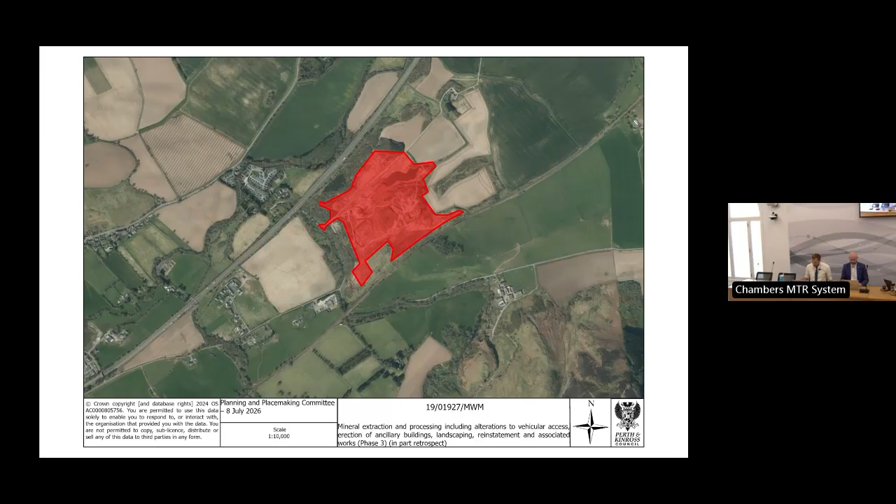Here we can see the location of the site, which is just to the south of the A9 at Shinafoot, Auchterarder, with access obtained from the B8062. The site extends to approximately 21.77 hectares and for many years has operated as a small-scale sand and gravel quarry, comprising a compound area, processing plant, silt ponds, access tracks, and areas of previously worked or partially restored land.

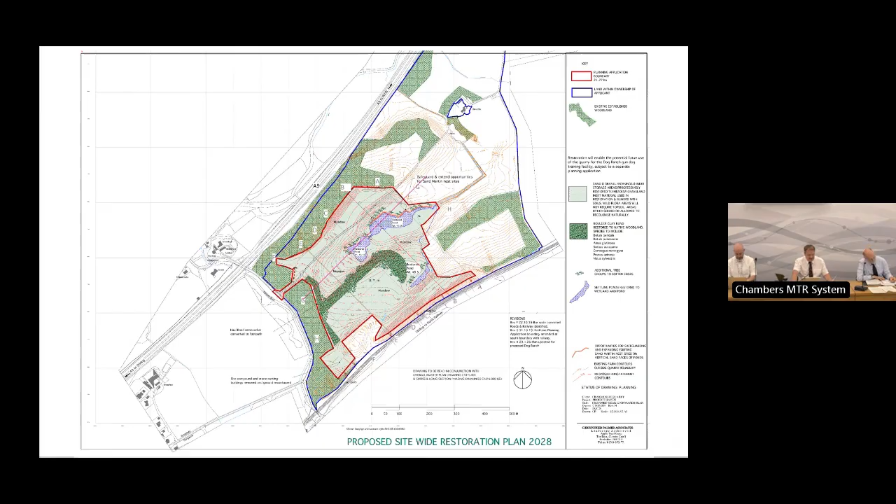This is a local application for change of use of a quarry to a gun dog training centre, including erection of kennels, a veterinary practice, reception building, indoor arena, maintenance building, staff and student accommodation, and installation of PV and air source heat pumps, with associated works, on lands southwest of Arns Farm, Auchterarder. To introduce the report is Mr. Panton.

Thank you, Convener. This next application relates to the quarry site we previously considered. The proposal is to make use of parts of the Craigrossie quarry by the applicant Mordor Gun Dogs as a dog ranch. Mordor Gun Dogs has a contract in place to purchase the entire Craigrossie quarry from the current owners, subject to receipt of planning permission today.

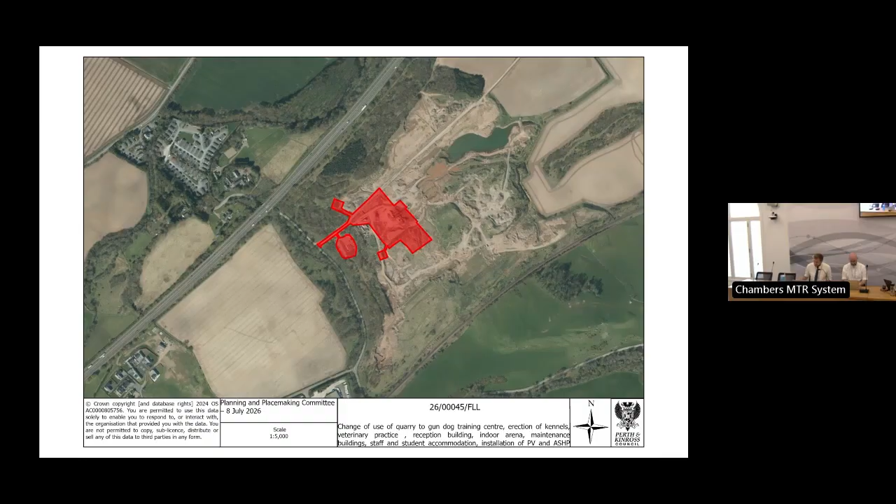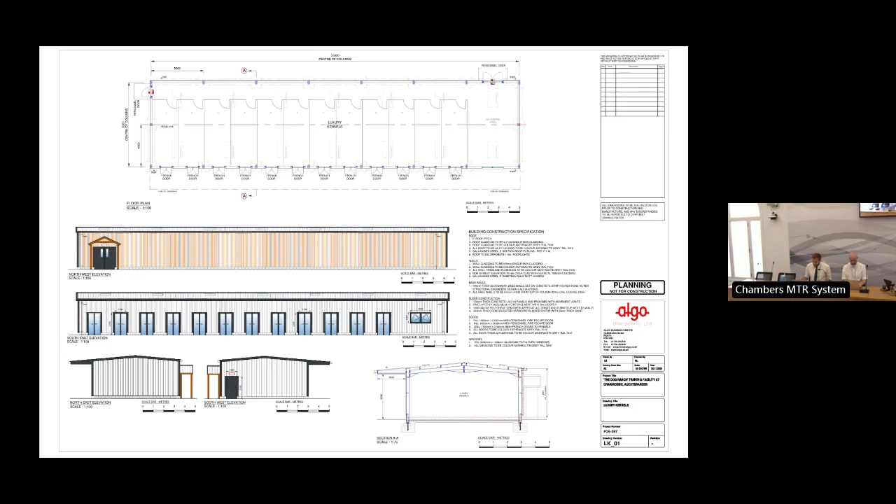Next slide, please. We now have the elevations and floor plans for the proposed luxury kennel building. As you can see, this building accommodates 12 spacious pens with their own doors. Next slide, please. We now move on to the proposed arena building, which would be the largest building on the site. Next slide, please.

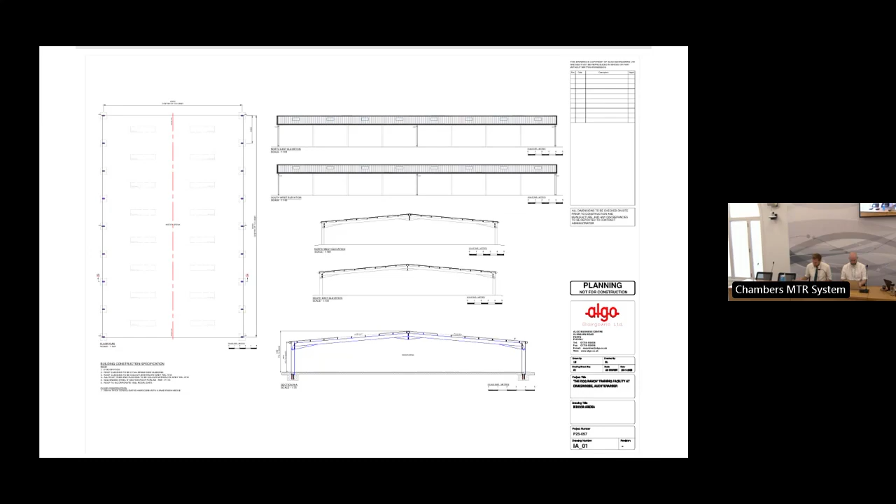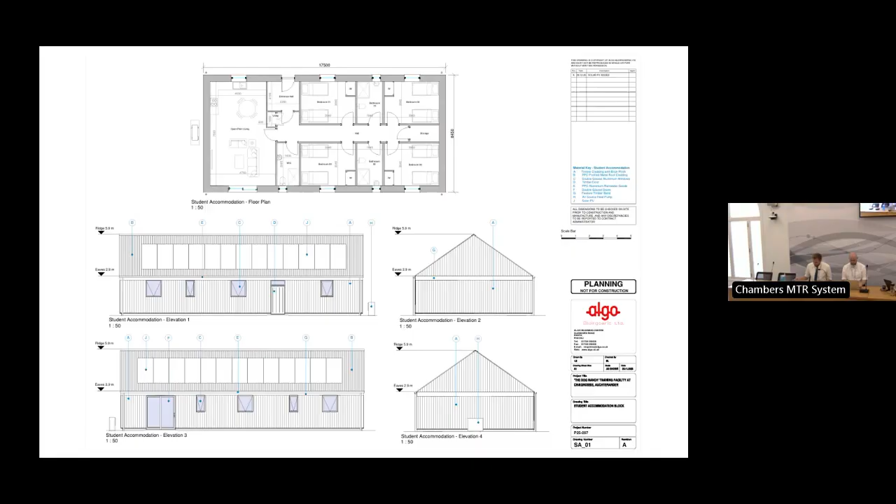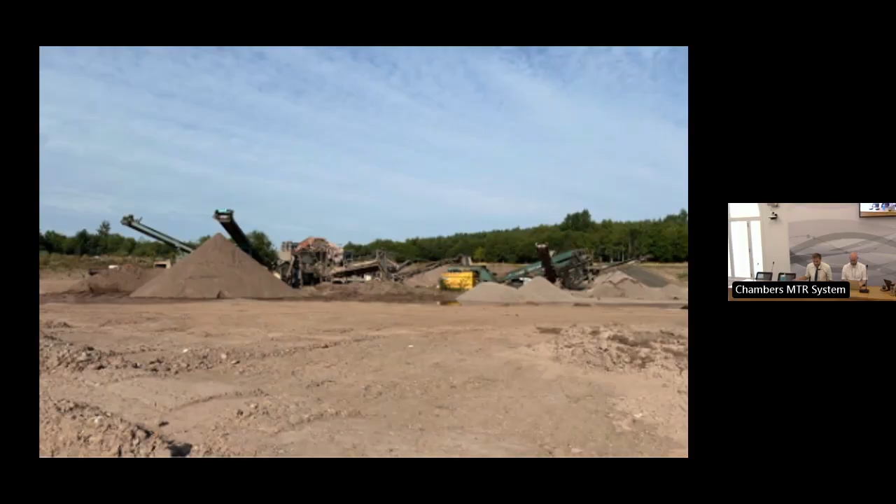Turning to images of the site now, here we can see some of the existing quarry operations which will be removed to accommodate the proposals. Next image, please. This next photograph again shows some of the existing operations. The proposals are considered to be a significant improvement from this. Next slide, please. This final photograph shows the existing sand and gravel quarry again, as detailed in the last application. Next slide, please. Thank you, Convener.

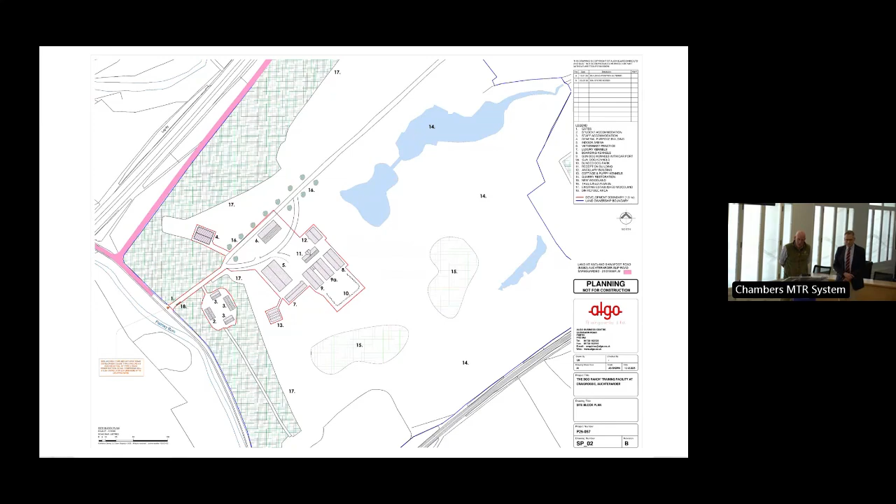Gentlemen, there's no further questions, you're free to go. Convener, there's no further deputations on this application, so I'll hand back to yourself. Thank you - can I ask members if they have any questions for officers?

Councillor Cuthbert: Thank you, Convener. I just wondered why this was coming to committee, because it's a local application. I don't see any objections, so I just wondered why it was here.

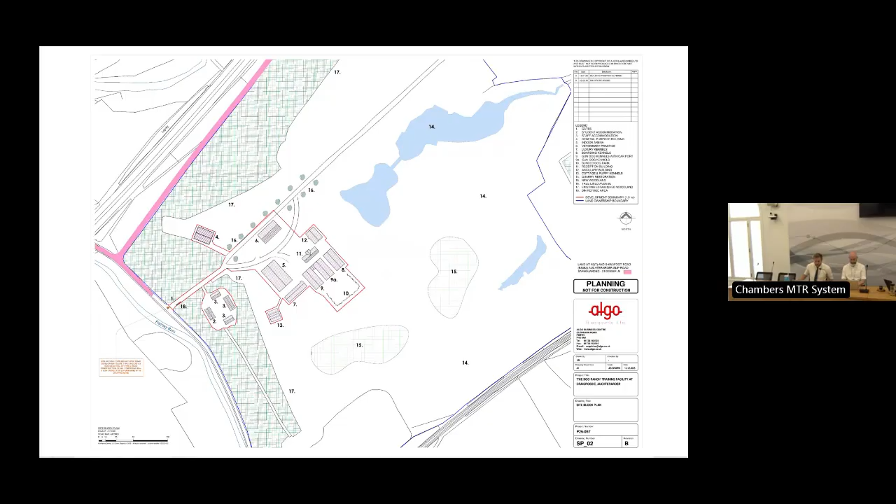That's a fair question. Ordinarily it wouldn't come. It's just because it was associated with the last application, which was a major, and it was cleaner to have them both determined together.

Okay, thank you. Councillor Harvey. Oh, just withdraw, sorry, same okay, question. Thank you. Can I ask for a motion?

Bailie McLaren, we'll take your motion. Thank you, Convener. Thank you. Yes, I would happily move the motion to proceed as per the recommendation set out in the paper by our officers.

This application represents a strong rural business that is growing, and it also consequently is dealing with the quarry site, where there's a win-win here for us, but this is local employment, local visual restoration, and it's something that is a really positive application that we're determining here today. So I'm delighted to be able to

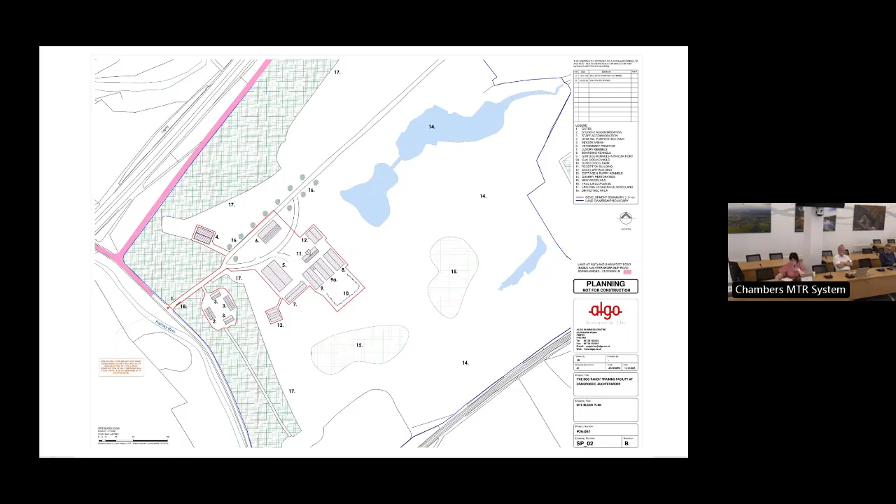put this forward for approval. Thank you. Councillor Allen, do you wish to second? Why not? I welcome the proposal, and indeed I look forward to the outcome. I've got absolutely no hesitation in recommending the approval of this plan, as was clearly obvious. Thank you.

Thank you. Do we have an amendment? No amendments. Therefore, can I ask committee to have any comment on the report?

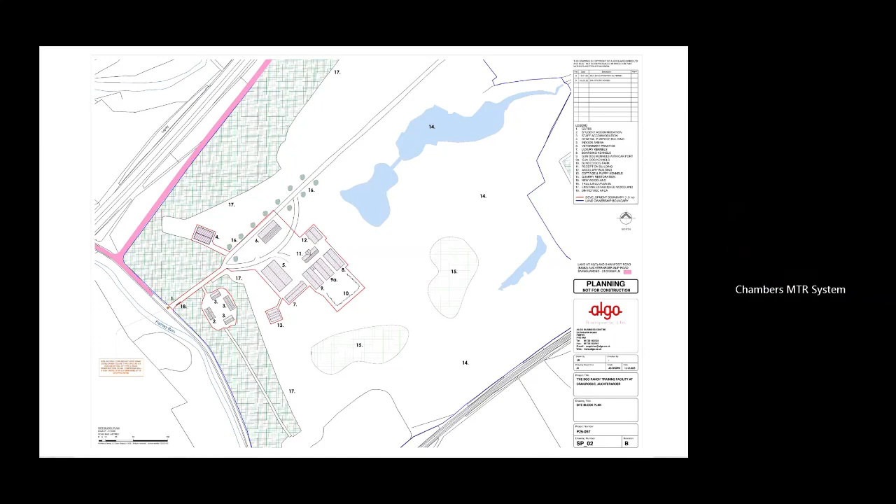Councillor Forbes: Thanks, Convener. I think this is a really interesting business, and it's great to see a business that's doing so well internationally, based in Perth and Kinross, and willing to invest some money into expanding. I think it's something that as a council we should be supporting more of. Delighted to hear also there won't be any illegal substances stored on site.

Thank you. Any further comment? No further comment. Therefore, planning permission is granted. Thank you, with the section 75.

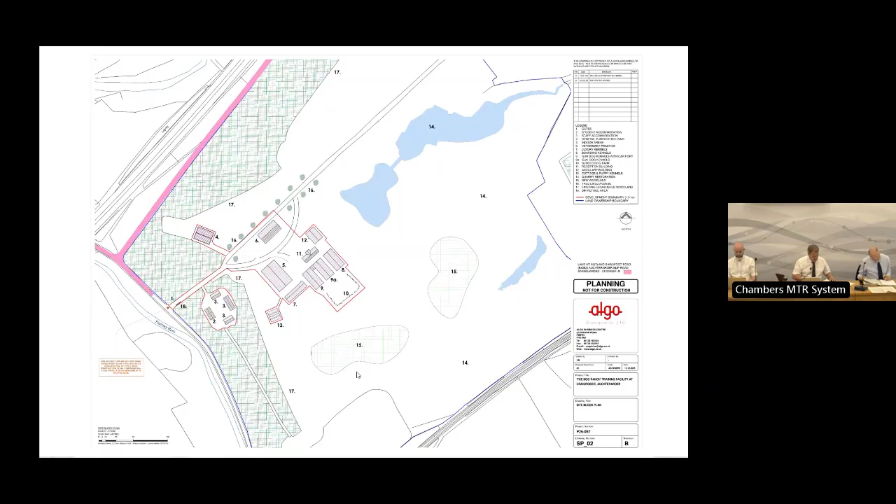Okay, so we now move on to the next one, which is a major application, for the formation of a 39 megawatt solar farm comprising ground-mounted solar PV array, battery energy storage system, a substation, inverters, transformers, welfare containers, fencing, CCTV cameras, vehicle access and associated works at land 890 metres east of Binn Farm, Strathmiglo. And to introduce the report is Mr. Panton.

Thank you, Convener. As stated, the next major application on the agenda today is for a 39 megawatt solar farm and battery energy storage facility with associated development at Strathmiglo. Members should note that only one neutral comment was received with no public objections. The proposal is therefore before the committee today, as it constitutes a major development. I will now take members through a short presentation to detail the proposals further.

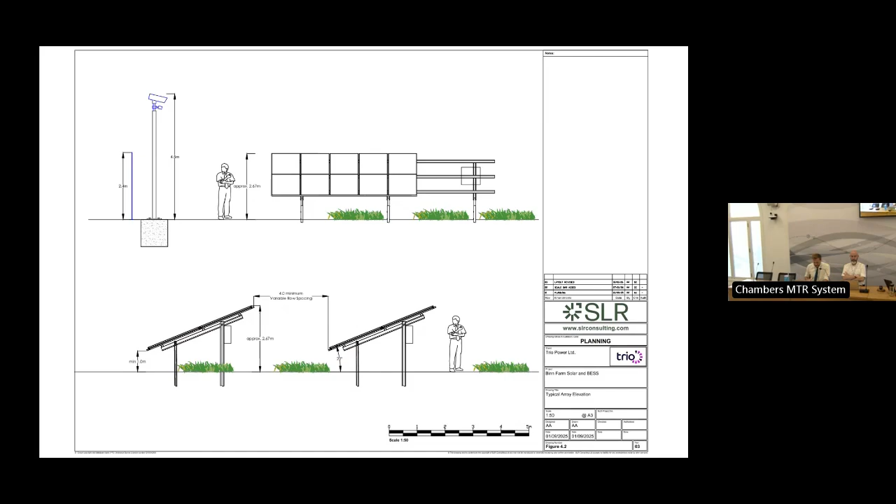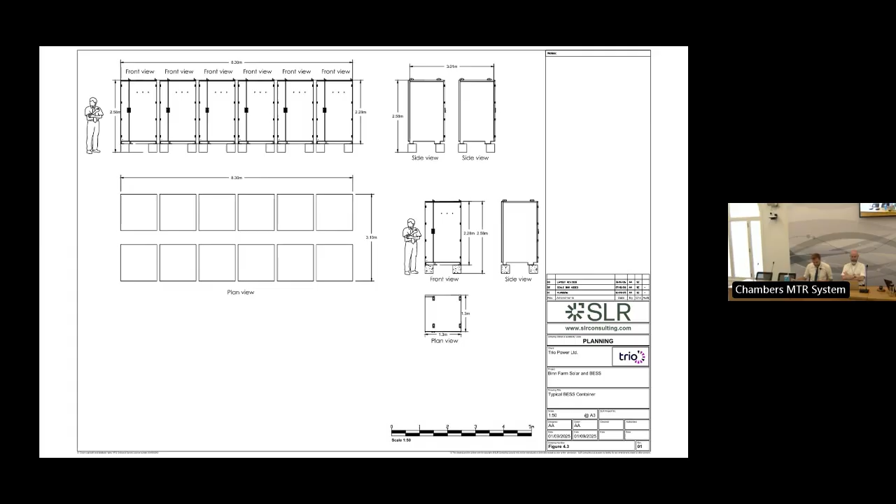That now concludes my presentation. I will leave members with the proposed site plan for reference. Members should also note the circulated update to the report, which updates some paragraph wording and conditions and also removes some duplicate informatives that were added to the report in error.

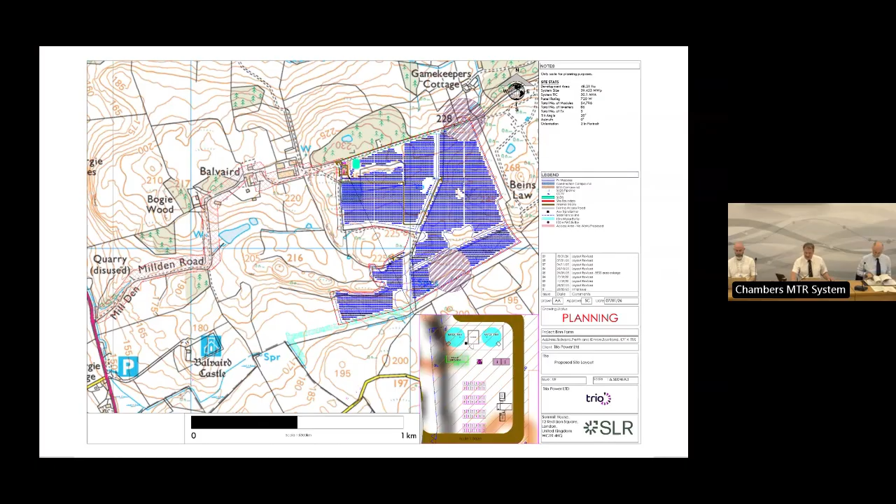Thank you, Mr. Panton. Again, we have deputations on this item, so I'll now hand over to the Vice Convener for the deputation procedures. Thank you, Convener. Can I call Mr. Lindsay, applicant? Good morning, Mr. Lindsay.

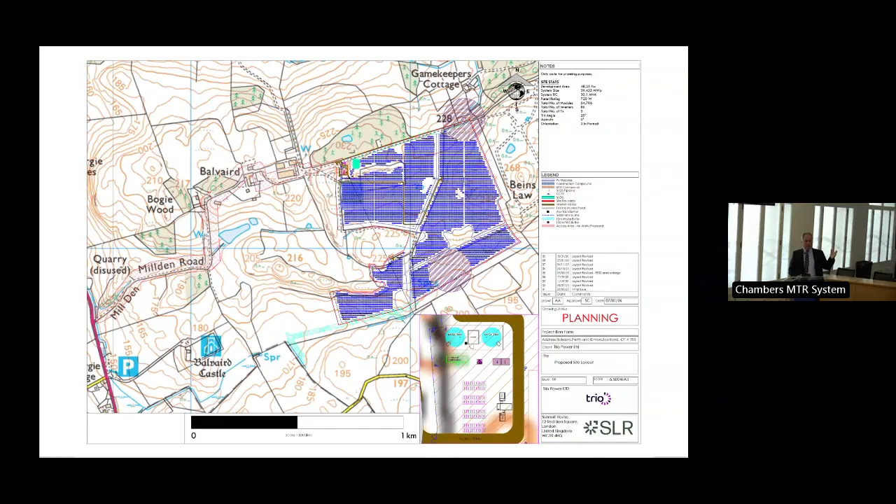Yes, there is. If you look at the map, the battery storage facility and the substation building is on the top left-hand corner, and that is quite close to some of the farm buildings where there's cattle storage at the moment - probably 100 meters or so, probably less actually. You can see the farm buildings in an area to the right, so the water will be provided from there. There'll be 2 points of access in and out of the battery compound, God forbid we need to have fire engines get access to it.

Councillor Allen: thanks Vice Convener, Mr. Lindsay, thank you for your presentation. It's quite something to come with one of these presentations and not have a lot of objectors, but we do have one representation about screening. So if you could just explain what your plan is for that.

That representation about screening was actually from a lady we know very well, who lives to the north about a kilometre away. Through her and her husband, we designed the screening at the top end - he has a background in this, so it was quite useful to agree the types of species of planting and how they should be planted. We know it's quite exposed up there, so some of the classical trees you might choose elsewhere wouldn't take in holes, so we adapted that. On the top right-hand side there's a new band of hedgerows and trees that will be planted, and that was in direct dialogue - we had probably 10 or so emails with that couple, and the gentleman was at the exhibitions, so we know him well and spoke a lot to him.

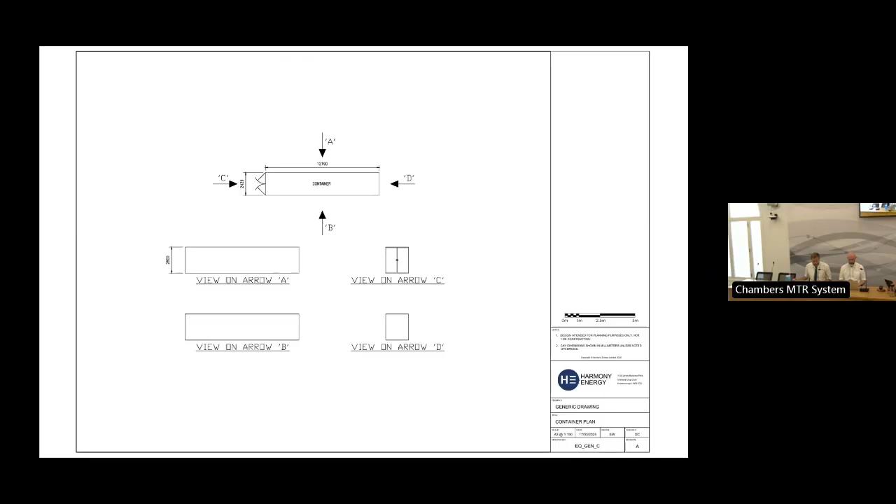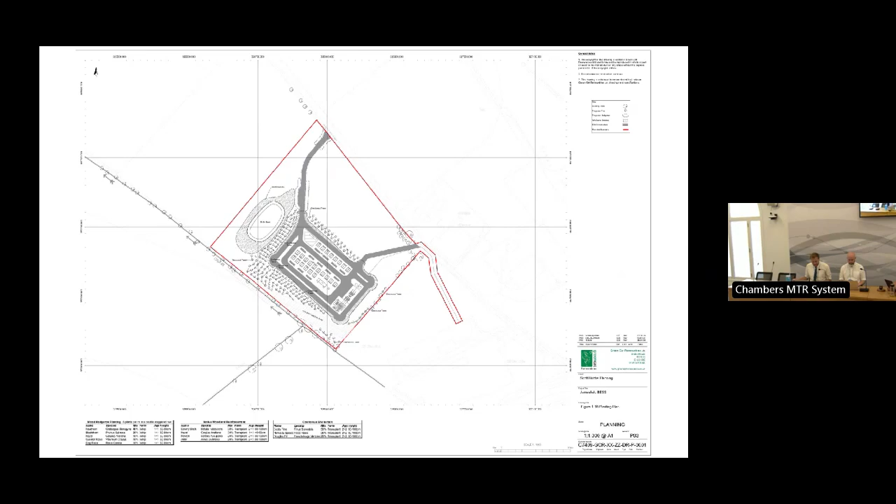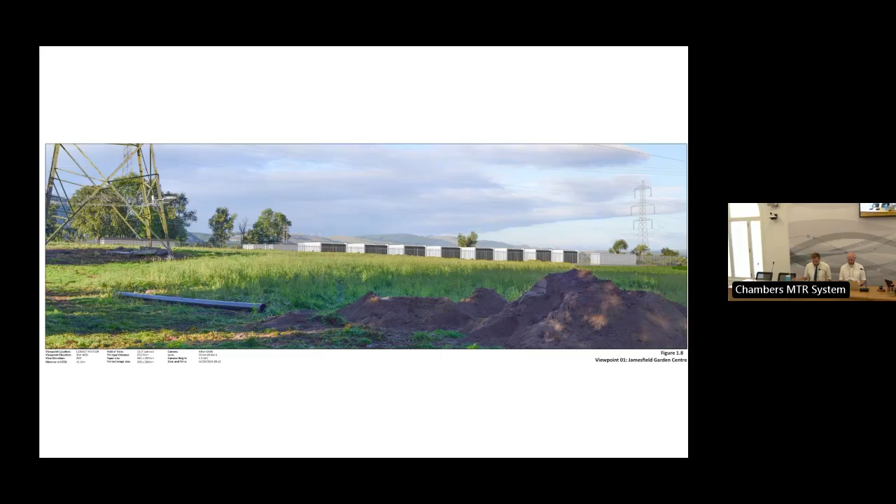We now move on to a series of recent photographs taken by the case officer on their site visit. This first photograph shows the site under question. You can note here that there are 2 pylon transmission routes that currently exist.

This next photograph again shows the site, this time looking back towards Abernethy. This final photograph shows the site in the winter, looking back towards the substation where the proposal will connect into.

Thank you, Convener. That now concludes my presentation. I will leave members with the proposed site plan for reference.

Before doing so, members should note that the circulated update to the report requires additional paragraphs, conditions and informatives to be added. In addition, members should note that the final page of the report indicates no letters of representation were received. This is incorrect, as 1 letter of objection was received, as detailed within paragraph 40 of your reports.

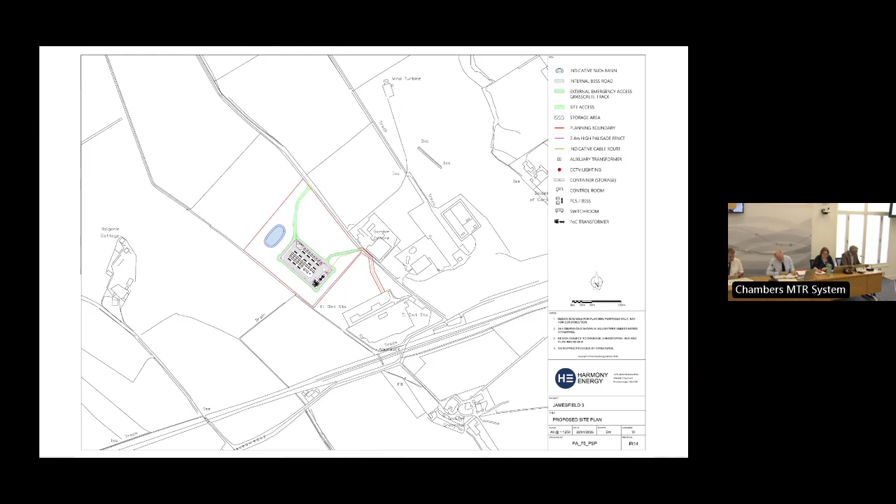Thank you very much. Good morning, Chair, and good morning, members of the committee. Thank you for the opportunity to speak in support of this application. My name is Tessa Fletcher, Senior Planning Manager at Harmony Energy, and we're the applicant.

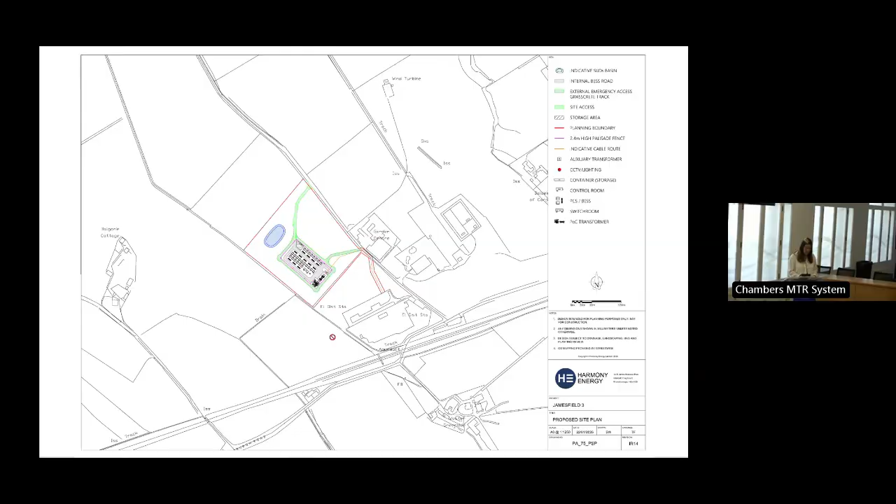Founded and headquartered in the UK, Harmony Energy is a leading developer, builder, owner and operator of renewable energy infrastructure, with an established track record of delivering battery storage energy projects here in Britain. We currently operate 17 battery energy storage sites nationwide, including the nearby 49 megawatt facility to the east of the garden centre, which was successfully constructed and energised in January 2024.

Throughout the determination of this application, we have worked closely with the case officer and would like to thank the Council for its thorough and professional assessment. We welcome the officer's recommendation for approval and agree with the conclusion that there are no material planning considerations which outweigh the provisions of the development plan. We also note that only 1 public representation was received and there are no outstanding objections from any statutory consultees. This proposal is for a 49.9 megawatt battery energy storage facility capable of storing sufficient energy to supply the equivalent of more than 160,000 homes for up to 4 hours.

This development would also help avoid approximately 6,000 tonnes of carbon dioxide equivalent emissions each year by supporting the integration of renewable energy into the electrical network. In addition to its environmental benefits, the project would make a meaningful contribution to the local economy during construction and operation, and can provide the opportunity for local supply chains and local trades to be used during the development's construction.

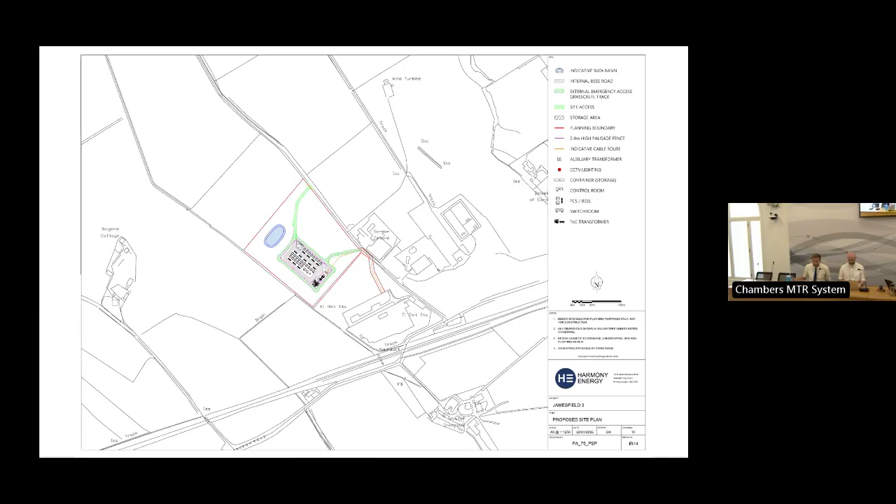One of the issues that was raised with me by the garden centre is the potential for fire, and she's saying I have to accept that she knows this better than I do. She says there's no fire hydrant or access to water anywhere nearby. Is that correct, and is that something that we would or have taken into account?

Thanks, Councillor Forbes. Most of that's controlled through the building warrant process, but as we saw in my presentation, there are 2 access tracks to this site, and that's a fire requirement, they have to have more than one access to the site. So from a planning perspective, they've met all they need to in terms of fire protection. It will now be over to the building stage to control that further.

Sorry, Councillor Forbes, I'm sure the applicant could have explained their approach to fire risk, etc., and I'm sure they have various things both on site and in terms of their action plans associated. It is a question that regularly is asked at this committee, but at this point in time, the planning regulations do not include for all those sorts of questions to be answered, and there are separate legislative controls. However, there is work ongoing at a national level that we hope to see come forward with guidance on what standards would be expected and should be set out at the planning application stage. It's not something we take into significant account at the minute, but there is work ongoing at a higher level, including the fire and rescue service, etc.

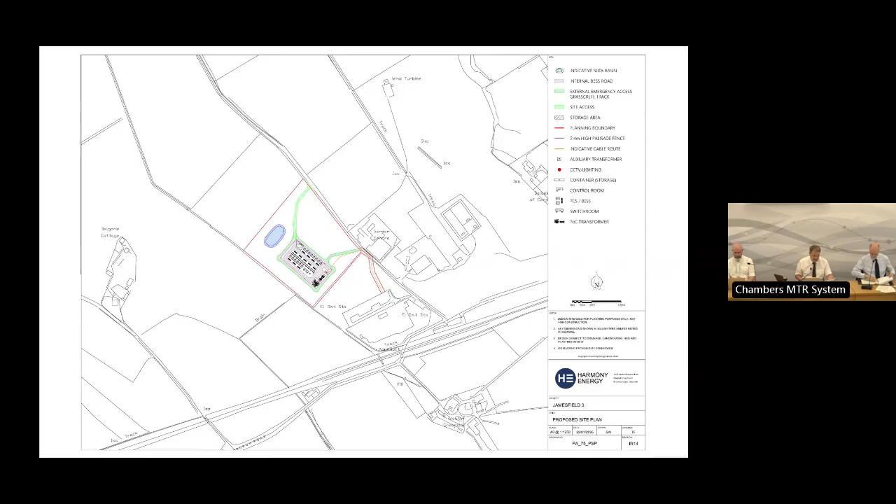Now we move on to the next item, which is probably going to be the longest one I've ever read out in my life. This is a Section 42 application to vary conditions 1, 3, 4, 5, 6, 7, 8, 12, 15, 19, 22, 23, 24, 26, 32, 33, 34, 35, 36, 38, 39, 41, 40, 42, 43, 45, 46, 49, 50 and 53 of planning permission in principle at Perth West. To introduce the report again is Mr. Panton. Thank you, very well read out, convener.

Planning permission in principle for a large-scale mixed-use development was granted on this site in November 2023. At the time the decision was issued, conditions were written on the assumption that the first approval of matters application would comprise a large-scale development, and as such the conditions were quite onerous. What is now likely to happen is that the first approval of matters application will be a small-scale application submitted by ourselves at Perth and Kinross Council rather than private developers.

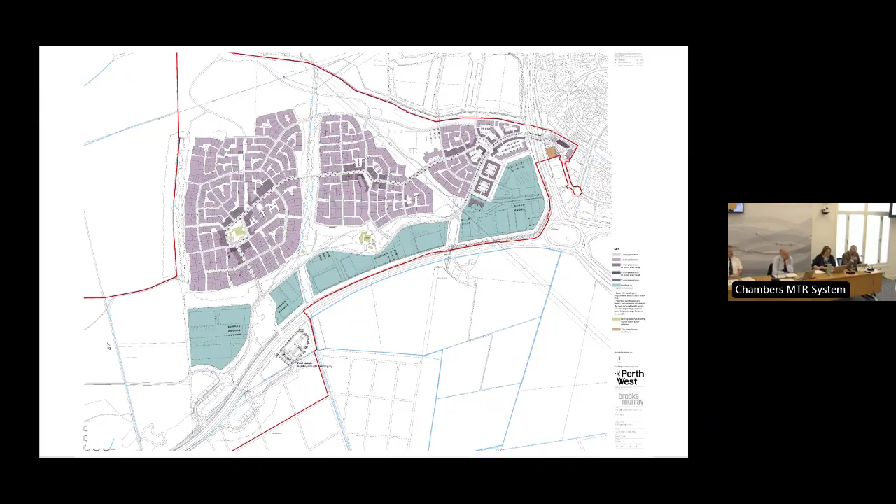Councillor Harvey: I'll ask a question. I was going to ask the officers, but I'll ask you. We heard the detail of what this change is required. Could you just give us a kind of practical or summary of what the change from previous to now is, in spirit?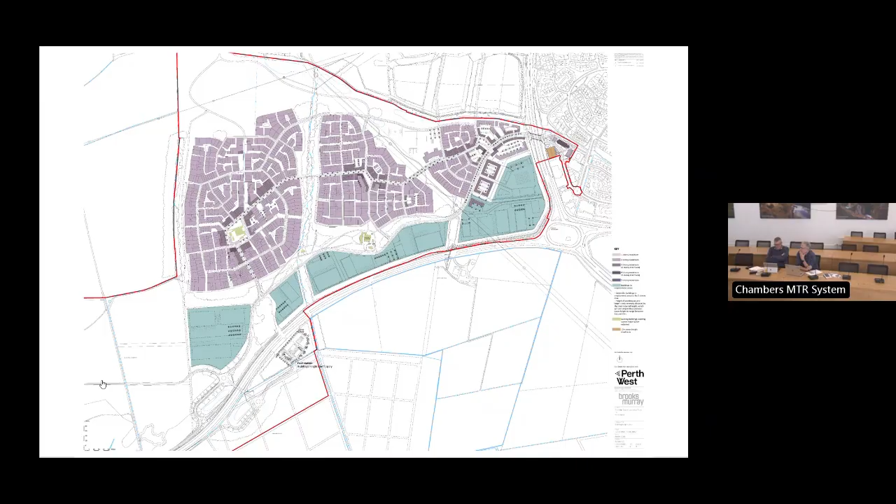There's not really any actual change to any of the proposals. This is purely kind of phasing. What me and my team are doing just now is we are preparing a scheme for an underpass, road and platforming for the Perth Eco Innovation Park. As Sean said earlier, the conditions were very onerous for such a small kind of infrastructure scheme. So our consultants on our behalf have prepared a submission just to break the conditions down so they're applicable per phase of what you're doing. So we are currently preparing an approval of matters submission that will come forward hopefully in the next month or so, and that will tie in with this new wording for these conditions, and it will make it a lot more streamlined and sensible.

So is the change to do with the phasing then of the development? Yeah, it's just the phasing for the conditions. Yeah, that's all it is.

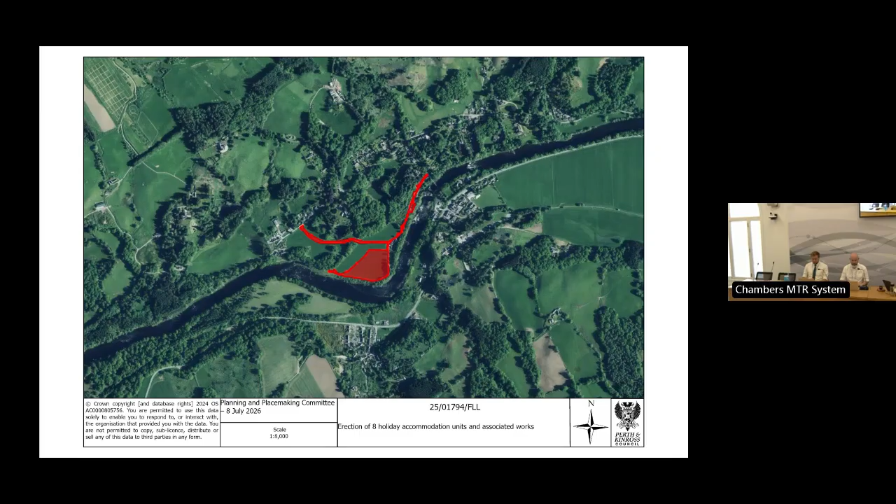The image on screen is an aerial view showing the extent of the site and some of the features surrounding it, such as the Tay, wooded areas, roads, fields, and groupings of buildings in the area, primarily Strathtay to the north. Note the narrow red arm that extends from above the main body of the site and links to the road running through Strathtay. This was to include a secondary access route, which is no longer proposed. Next slide, please.

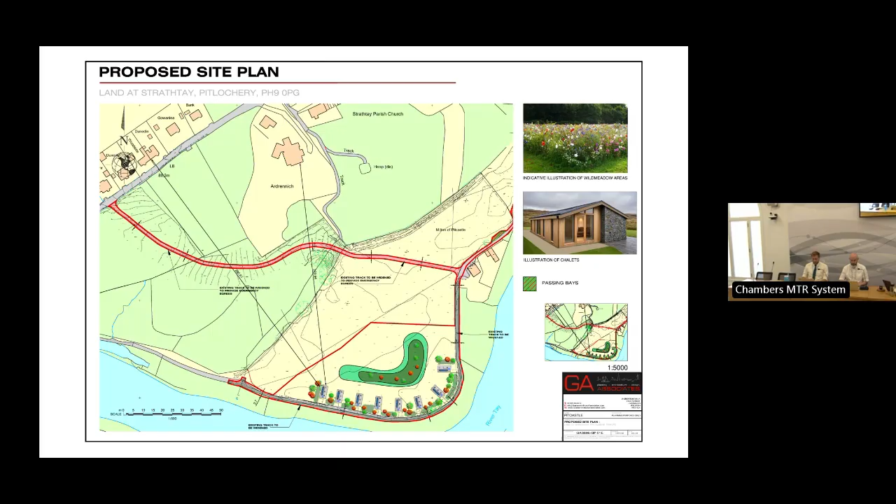Here we see the site and the originally proposed layout, now updated to take account of some concern over the uniform layout of the lodges. Additionally, the initially proposed new secondary access track east to west is no longer proposed. The superseded detail is shown to provide further context to the original scheme, the location and surroundings. Next slide, please.

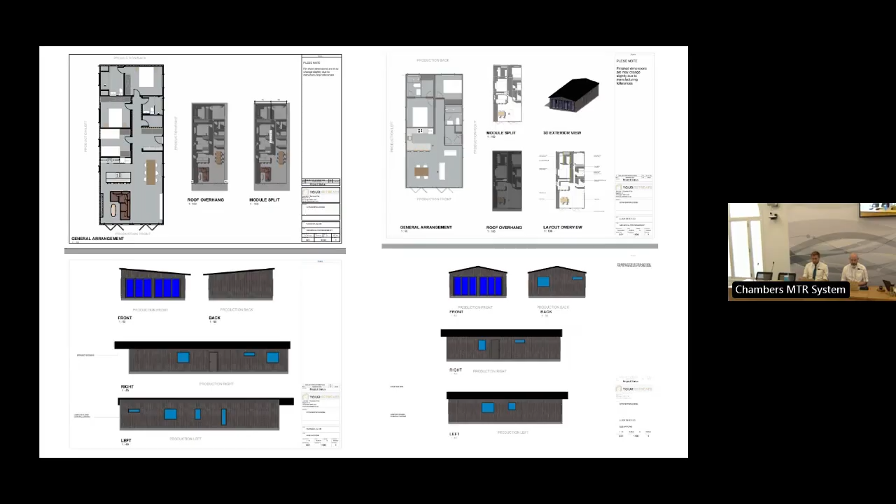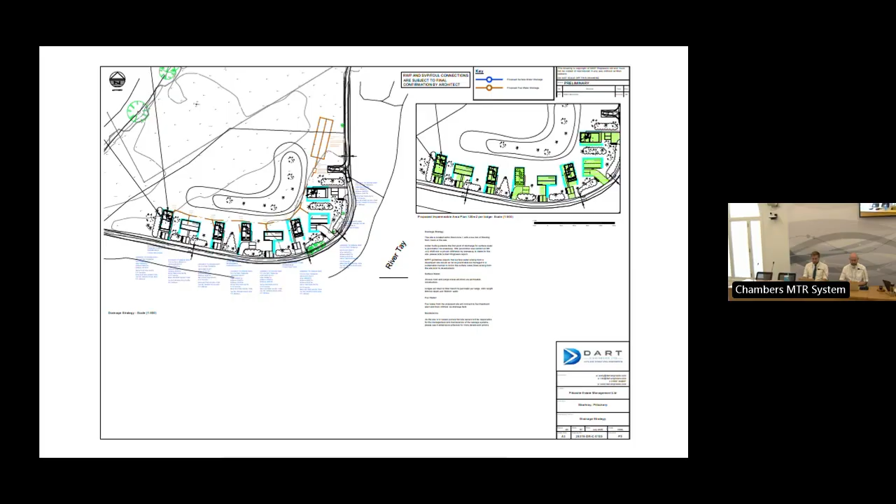This final drawing shows the now proposed layout of the lodges, which are in a less uniform arrangement. Also indicated is the landscaping. Next slide. Here we move to a series of photographs to give some visual context.

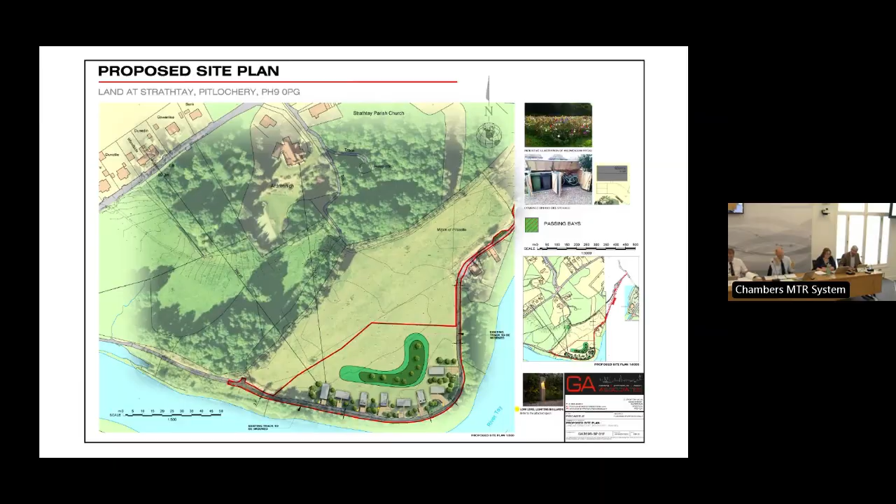Councillor Harvey. Apologies, Vice Convener, I couldn't find the place I was wanting to answer the question. Just to reiterate a point you made, and thank you very much for your presentation, and thank you for spending the time to come down here. You mentioned about the economic case for this development, that it's not justified. Can you just expand on that a little bit more? Thank you.

Press again. Let me. In the business case the applicant puts forward, it assumes occupancy rates of 45% over the first 5 years. Elsewhere in the proposal, he uses contradictory figures when calculating the economic benefit case, using a 68% occupancy figure. So the business plan states 45%. The later figures used to justify economic benefit to the area use a 68% figure. There is no source for that 68%. It doesn't align with their own business case, and it doesn't align with average occupancy of self-catering accommodation in the area. So it's a big stretch, and it helps make a stronger economic case, which is not a very strong case.

But that is one example that I can give you. I can give you further if you wish them. There are a lot of them.

No, I just want to clarify, it's about the economic justification of the economic case as per points 7 and 8. Okay, no, that's fine. That's what I wanted. Thank you.

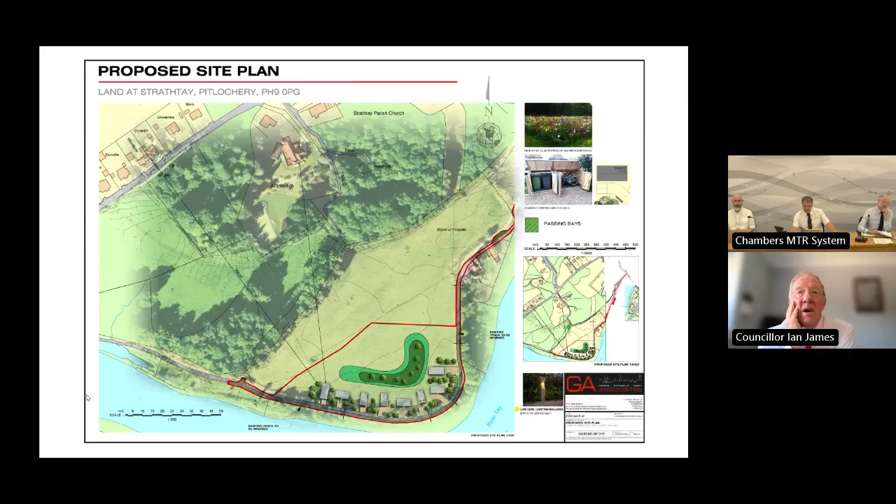Thank you. And Councillor James, your first question. Yeah, thanks, convener. There was quite a hoo-ha made about the road access. I just wondered if Lachlan was online, whether he would be able to comment for us, please. Lachlan. Yep, sorry, I can't get my camera to come on just now. Apologies. Oh, there we go.

That's my camera now. Yes, so in terms of my assessment of the vehicle access at the site, I undertook a site visit, as you're aware, and you've maybe seen in some of the photographs presented today. The width of the track there is 3.3 metres as you're coming up. There is a little bit of space beyond that, which has had vegetation growth on it. So it is very much a single file access into the site.

In terms of the passing places along the track, and what's proposed within the red line boundary presented for the application, the first passing place is at 60 metres from the vehicle access itself, and that's the one opposite the cottage where the garage is. I know it's been advised to us that that might not always be available, but my understanding is that that was within the red line boundary of the application and would be in the gift of the applicant to have discussions with the landowner on that point.

Beyond that, the next one's at 40 metres beyond, so that's 100 metres in. The next one would be 100 metres in, plus 40 from the other passing place, provided on the north side of the track as well. Beyond that is another passing place at 50 metres, on the south side of the track where the hydro scheme is currently located - there's a big large area there. Beyond that, there's another passing place proposed at 90 metres, on the north side of the track. And then beyond that again, the next one's at 35 metres, just before Milton of Pitcastle, which is a dwelling house along the track.

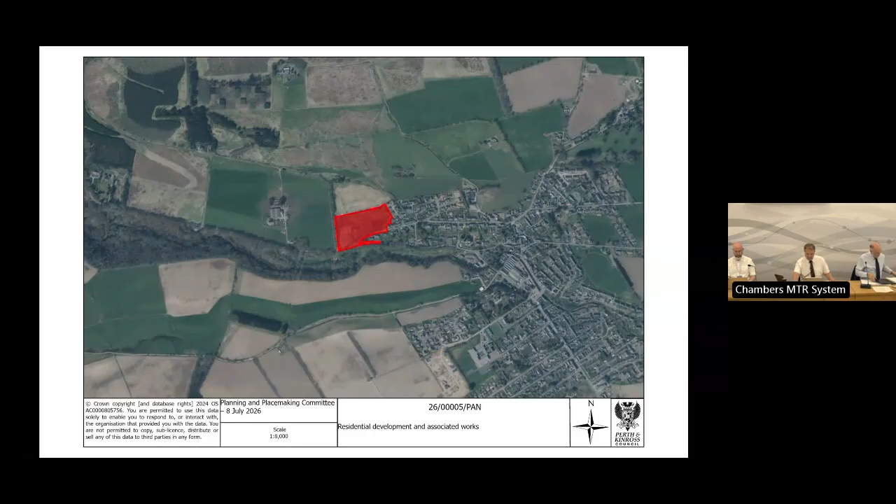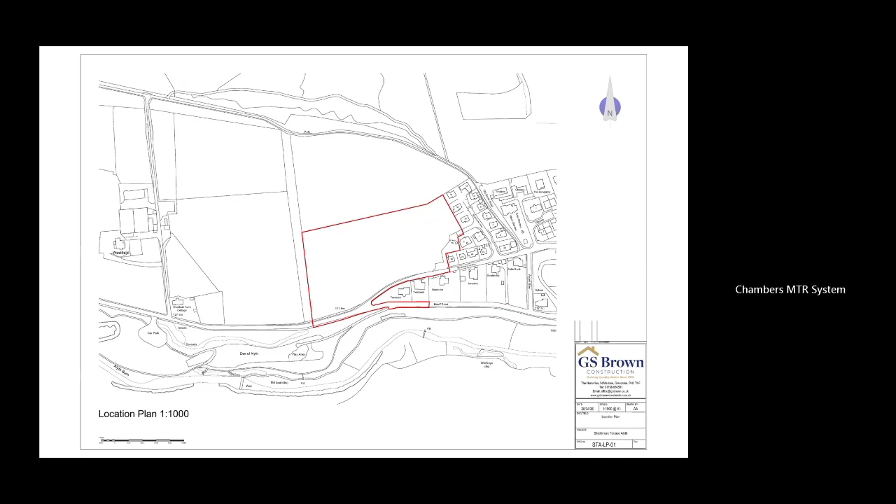Okay, we move swiftly on, and we've got a couple of plans today. The first one is for a residential development and associated works at land 100 metres west of Strathmore Terrace, Alyth. Do we have any comments on that? Bailie McLaren. Yeah, thank you. I would like the applicants to consider path networks, travel routes, active travel routes through this site. It's zoned, but as well as other aspects, can we please keep our eye on the opportunities of path networks? Thank you.

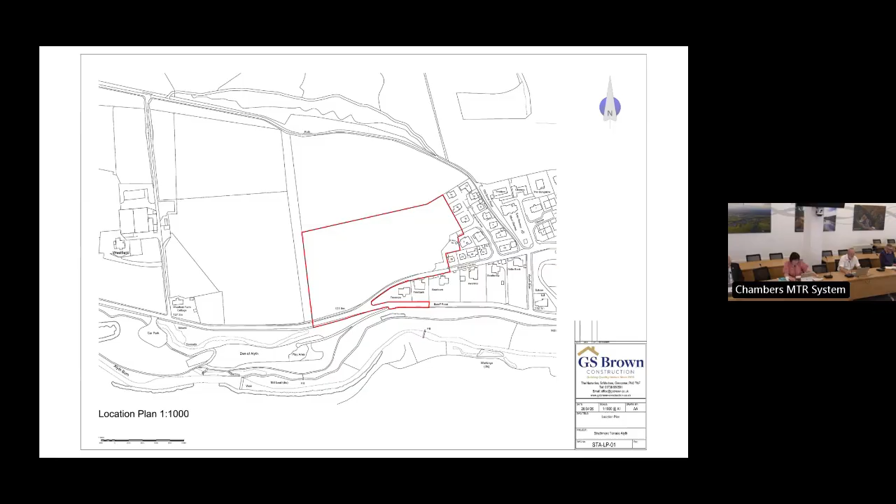Thank you. And the next one is for the erection of an office building, formation of access and parking area, and associated works at land 880 metres north of Bertha Park, Perth. Do members have any comment on that? No comment on that. That's the last.

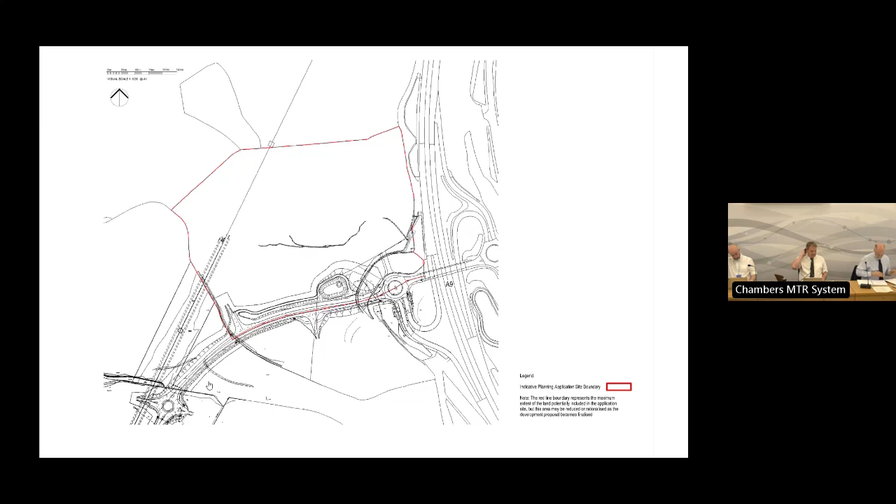Oh, sorry. Councillor James. Yes, sorry, convener. I couldn't get anything in. Yes, I'm glad to see this coming forward, but I just wonder, it's quite a large development already, and are we able to look at local services? Are they sufficient for this building? Thank you.

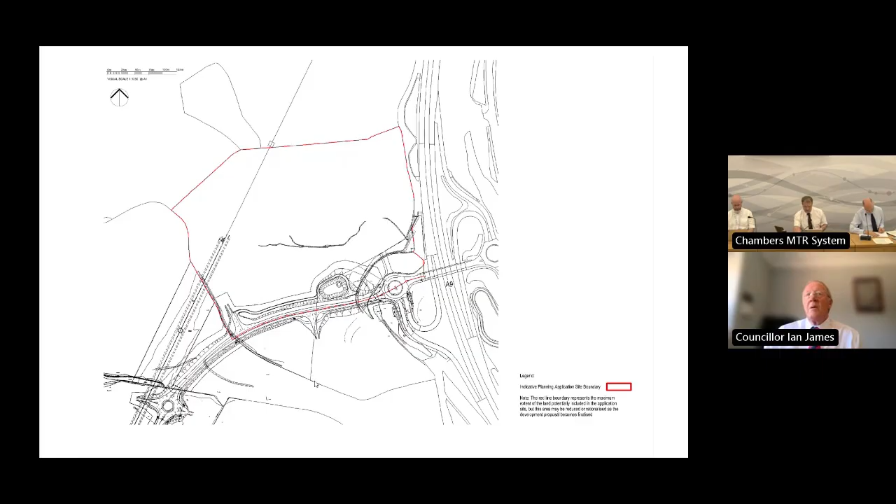Okay, thank you for that. No further comments. Okay, that's the last item of business today. So thank you everyone for being here today, and thank you everyone for watching. Thank you.